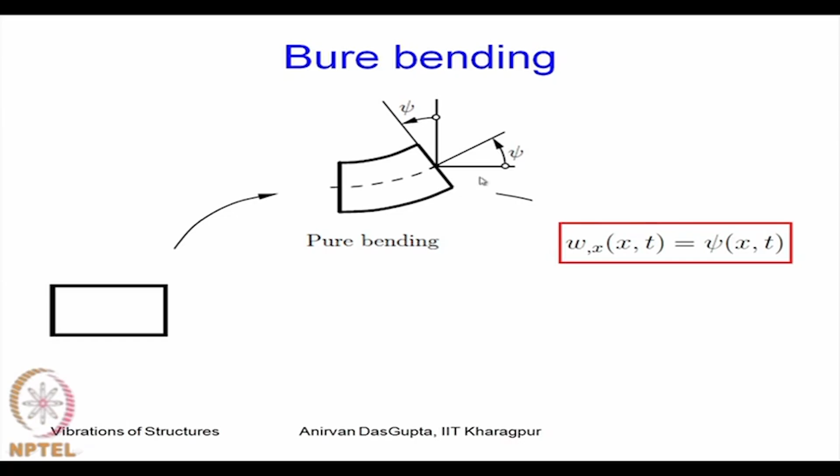So, therefore, when we put these two things together, which means that a beam undergoes both flexure and shear, it is under bending and shear. So, the total picture looks like this. This is the pure bending picture, this is the simple shear picture, and the net result is shown here. Now, you can see that because of the shear, the angle does not change, as you can see here. So, this was vertical, so this remains vertical. Which means that this angle, measured from the vertical, remains psi, whereas the slope of the neutral axis changes.

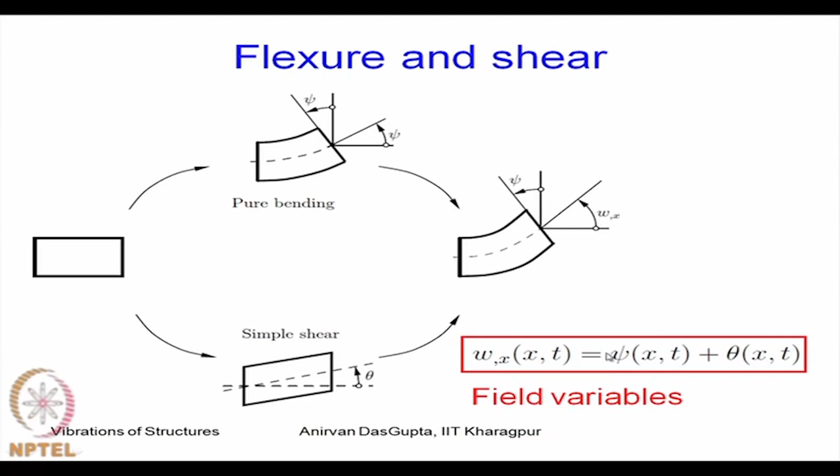So, we can consider our field variables when we denote or represent the deflection of the beam. We can use any two of them. So, what we will do is we will choose w and psi as our field variables. This is the transverse deflection and this is the flexure angle.

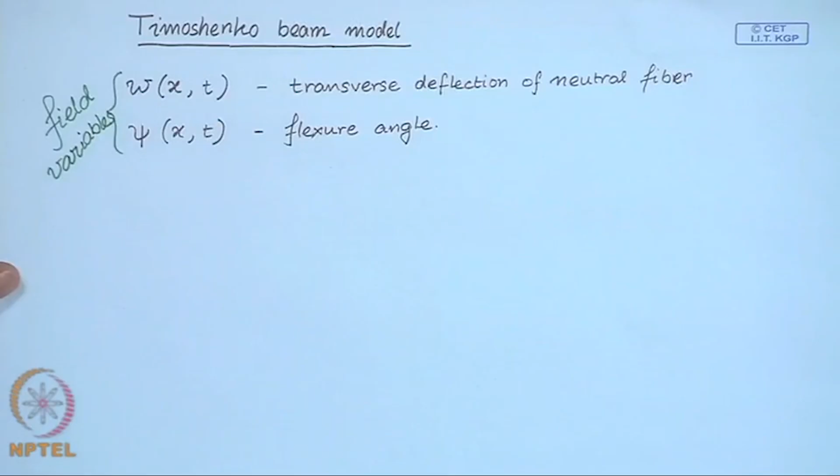So, these are the two field variables that we will use. Now, let us start representing our deformation in terms of these field variables.

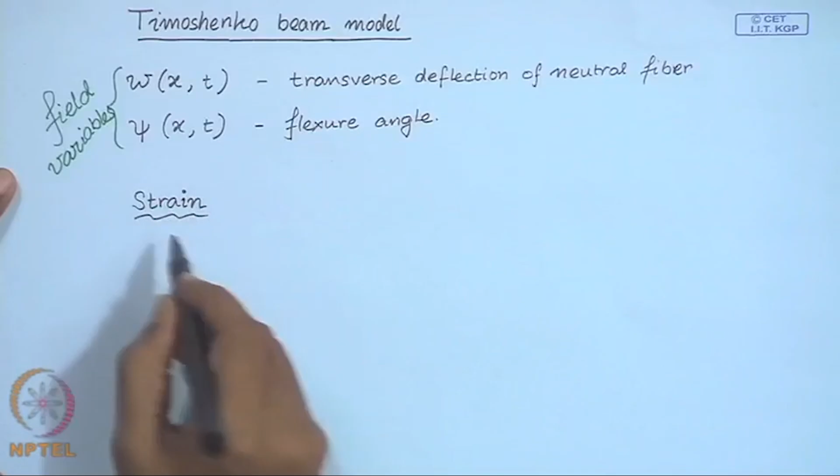So, the first thing is the strain, the fiber strain along the longitudinal direction of the beam.

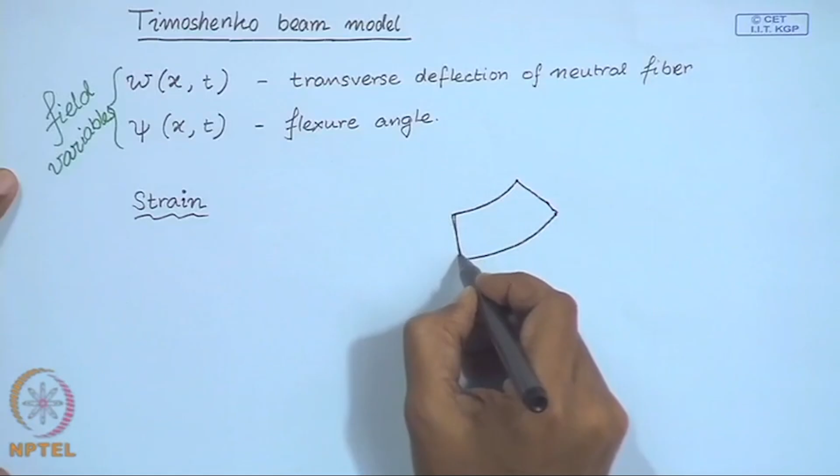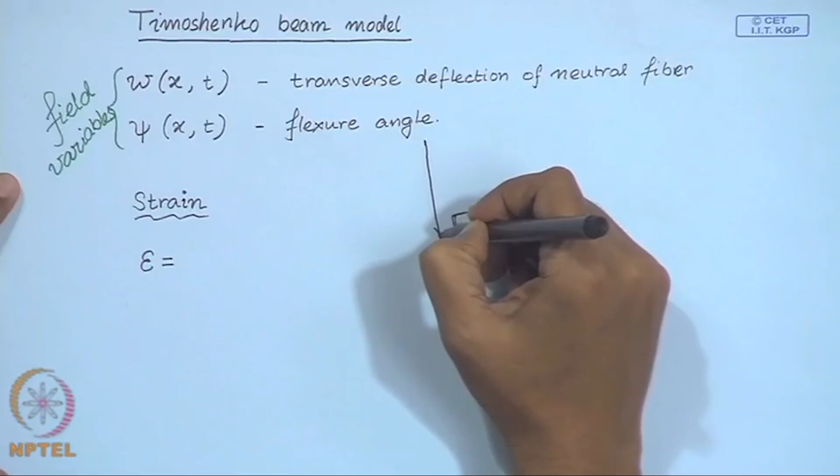If you once again consider fibers at a height z from the neutral plane or neutral axis, then following our discussions in the previous lecture, we can write the length of this fiber. If rho is the radius of curvature, then rho minus z, which is this radius, times this angle, gives d psi, the additional angle.

So, we are considering an element between x and x plus dx. The strain can be written as the current length of this fiber minus its initial length, divided by the length of the element.

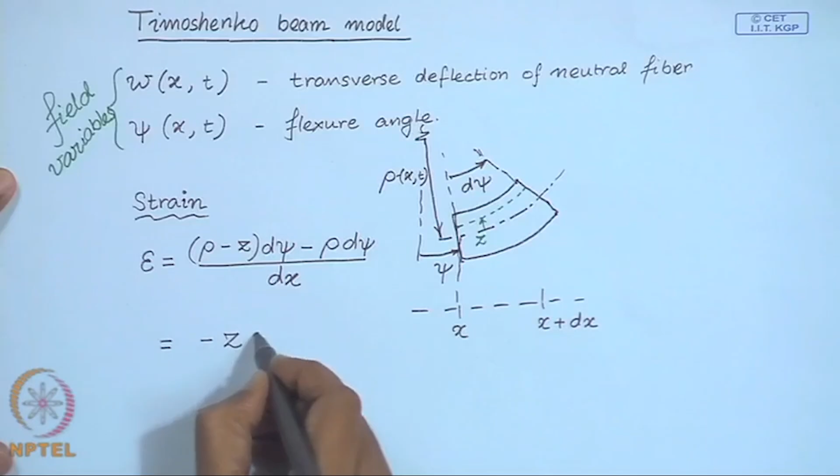This can be written as minus z del psi del x, in terms of the angle by which this section has rotated. So that is the strain in this fiber. If z is positive and del psi del x is positive, then this strain is compressive.

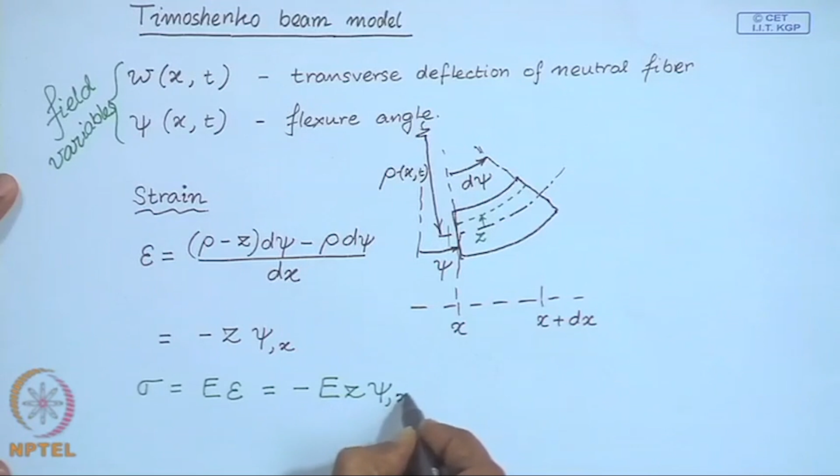Then we can write stress using Hooke's law, so that then becomes...

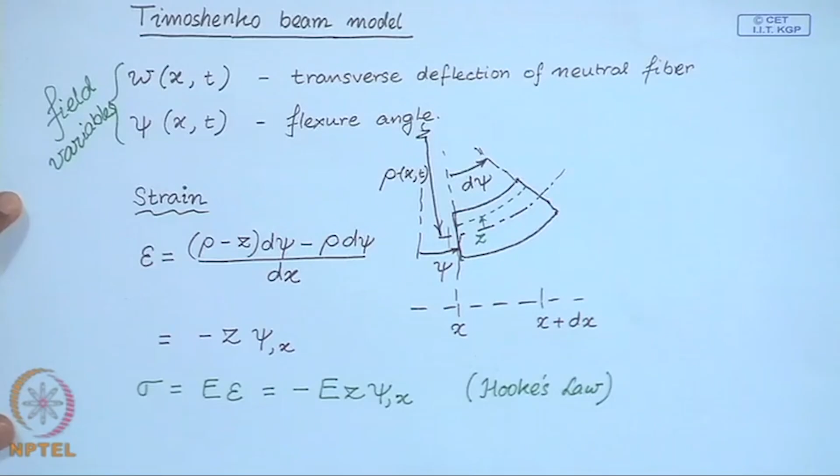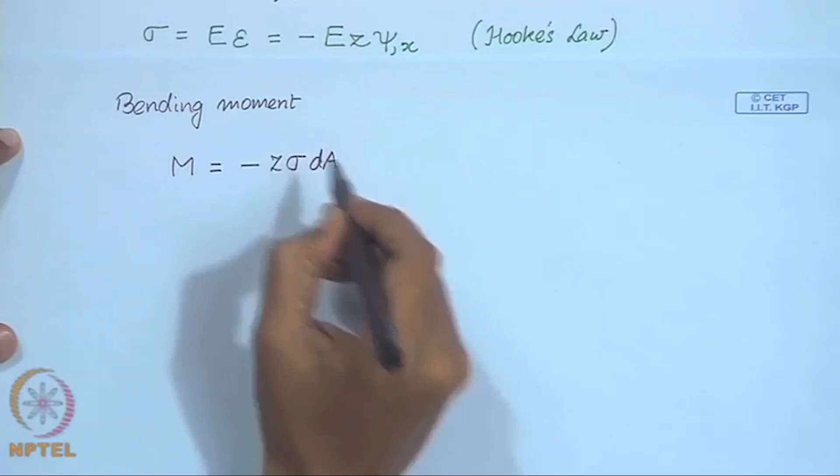Now with this expression of stress, we follow the steps that we carried out in our last lecture. We determined the bending moment as negative of sigma times dA, this is the force; so z cross the force, integrated over the area. If you substitute this expression of sigma, then you can easily see, the way we have done before, that the bending moment turns out to be E I del psi del x.

Now, the next thing is to determine the shear force. In the models that we looked at in the previous lecture, shear force was introduced in the equilibrium equations, considering that the beam element is infinitely stiff in shear.

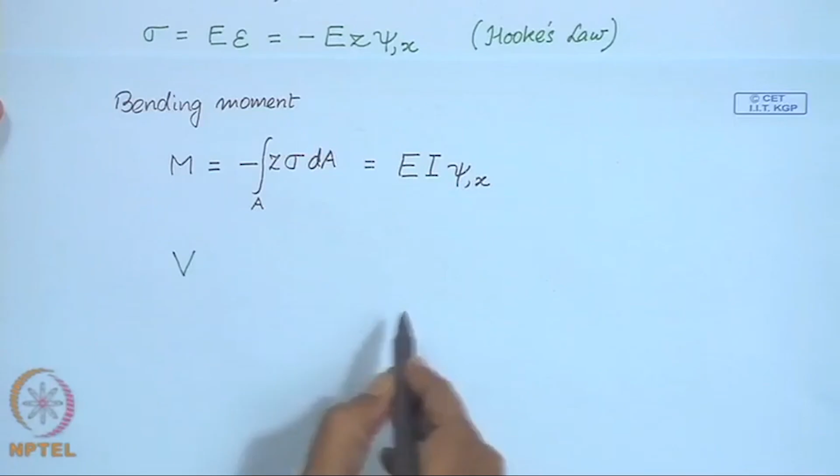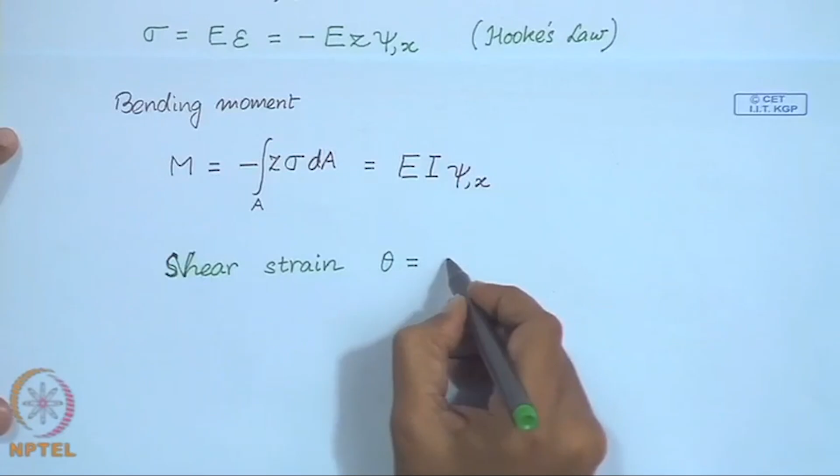But today, since we have introduced the shear strain, we know that the shear strain, given by theta, is nothing but del w del x minus psi. So we can represent shear strain in terms of our field variables w and psi.

Then I can write the shear stress acting on the cross section. The shear stress is G times the shear strain, where G is the rigidity modulus, times the area of the cross section, that gives us the total shear force.

Now, as you know, in a beam, what we learn in mechanics is that the shear stress is not uniformly distributed over the cross section. So, just multiplying it with the total area of cross section is actually going to overestimate the shear force; the actual shear force will be less than just the product of shear stress and area of cross section.

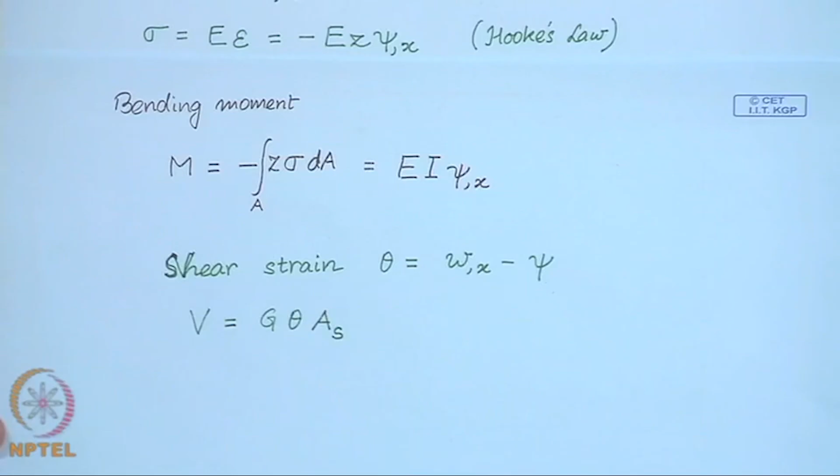So, what we do to remedy this problem and to keep the formulation simple, we introduce what is known as a shear correction factor. We calculate a corrected area, where AS is the actual area of cross section of the beam divided by a factor kappa, known as the shear correction factor.

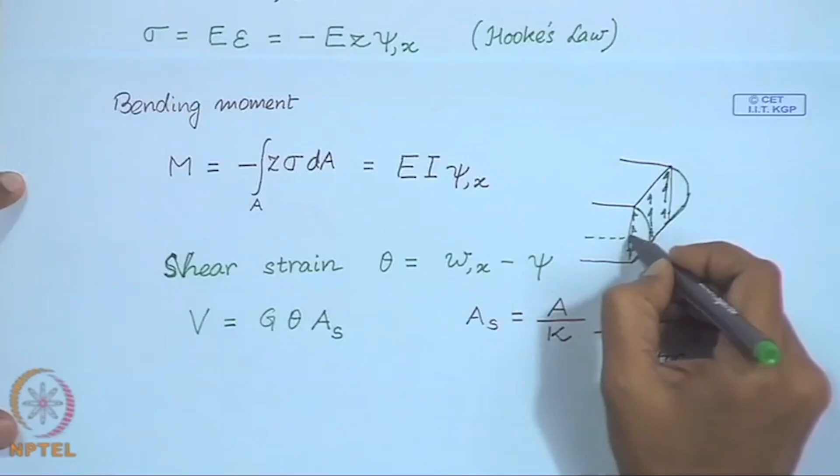As you know, for example, in the case of a beam with a rectangular cross section, the shear stress distribution is parabolic. It is maximum at the neutral fiber and reduces to zero at the top and bottom fibers, because there is no shear stress on the top and bottom surfaces. So, the distribution of shear stress in a rectangular beam is parabolic.

Now, to take care of this fact, we introduce the shear correction factor and calculate a reduced area, and multiply this area with the shear stress to determine shear force, keeping the expression simple. For that reason we have introduced this shear correction factor.

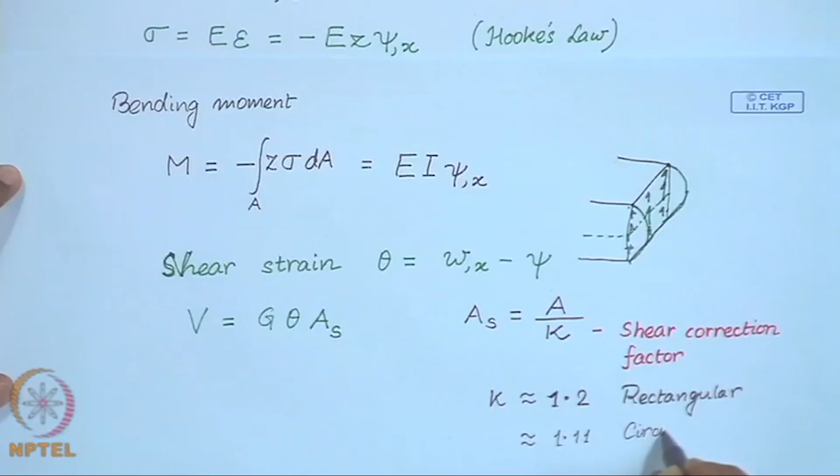Now, this shear correction factor typically takes on values of about 1.2 for rectangular cross section, approximately 1.11 for circular cross section, and from about 2 to 2.4 for beams with I cross section, I-beams. So, these are some typical values used in various situations.

Now we have a very simple expression of the shear force acting on the cross section, so we can write this as... that is the expression of our shear force.

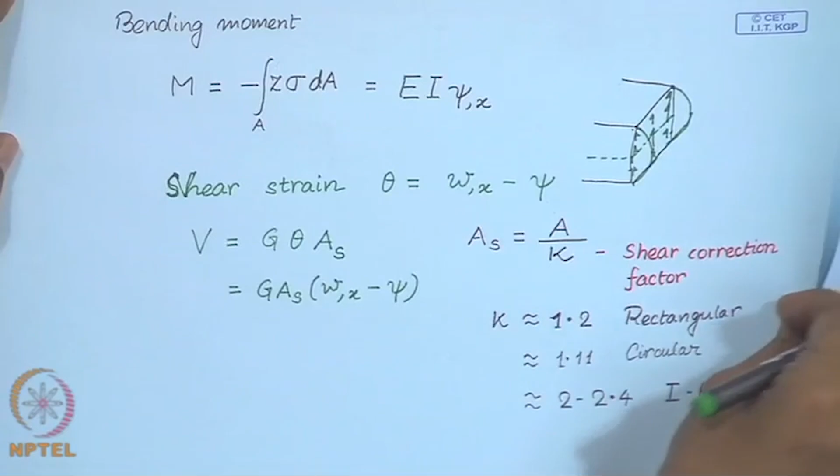Now, we have these forces and moments. Let us look at the free body diagram of this beam element. This is an exaggerated view.

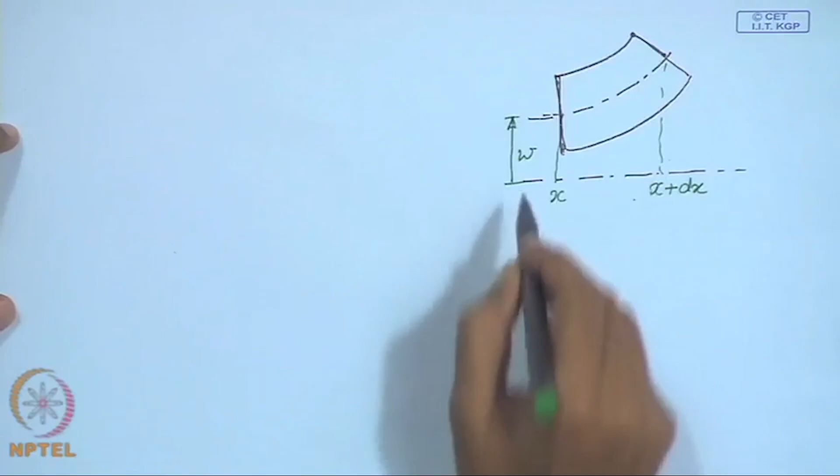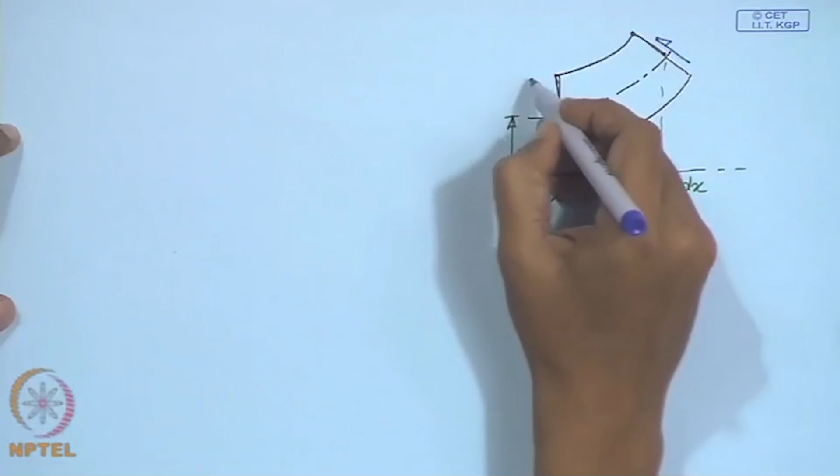So, this is the transverse deflection at x at time t. Here we also have these shear force and the bending moment.

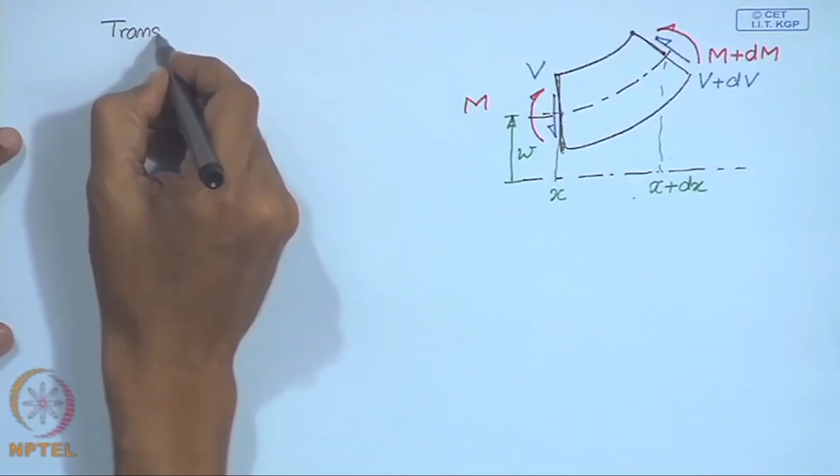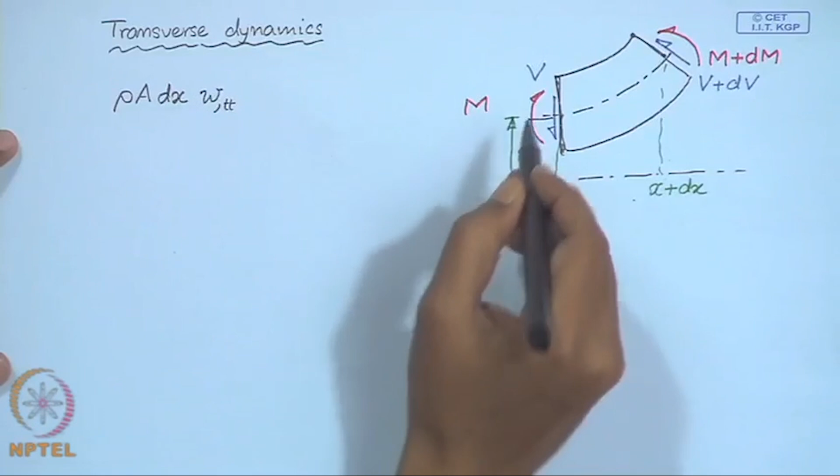So, if you write down the transverse dynamics for this element, if rho is the density of this material, A is the area of cross section, then rho times A is the mass per unit length times dx, which is the length of this element, is the mass of this little element multiplied by the acceleration, and that must be equal to.

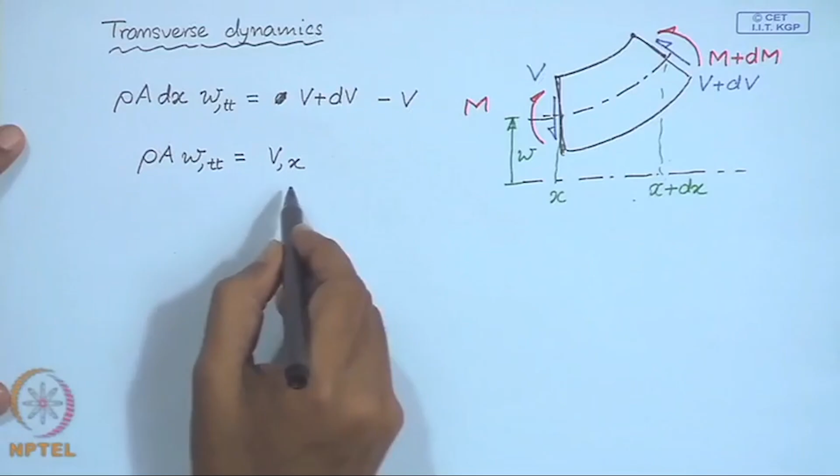Now we know that this expression of V. So, we have this expression of V. So, introducing this expression here, so this is our equation of transverse dynamics for this element.

Now, the next thing is the rotational dynamics.

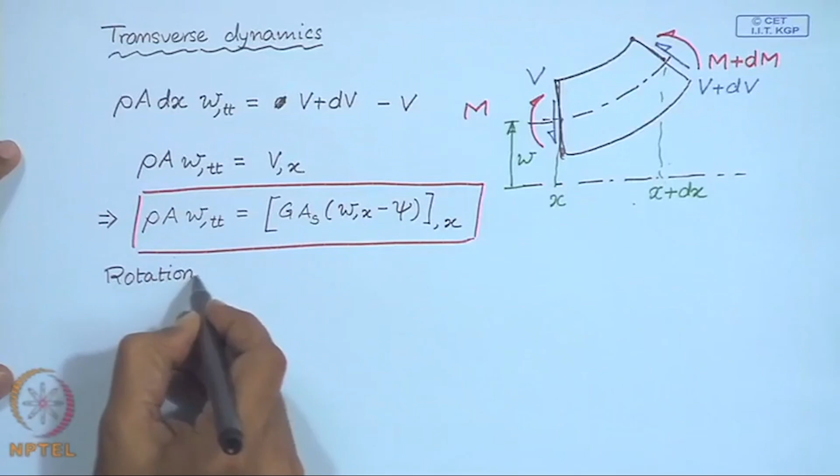So, rho times the second moment of area about the neutral axis. So, this, as we have discussed previously as well, this is the moment of inertia about the neutral axis per unit length. So, this times the length of the element would give us the moment of inertia about the neutral axis, which is perpendicular to the plane of the paper. So, this times the angular acceleration.

Now, this angle, the rotational angle, is psi. So, this is the angular acceleration, and that must be equal to all the moments about the center of mass of this element. So, we have

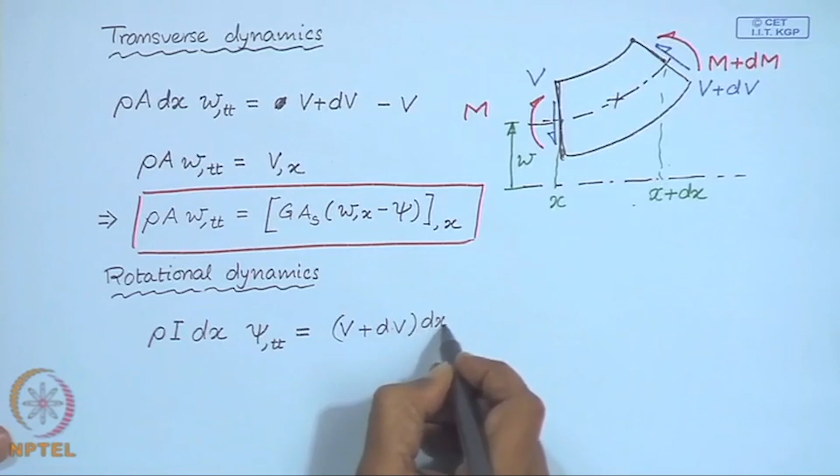Because of this shear force, and because of the moments, bending moment. So, we obtain

Dividing over by dx and considering that dv dx is of smaller order, then we obtain the equation of motion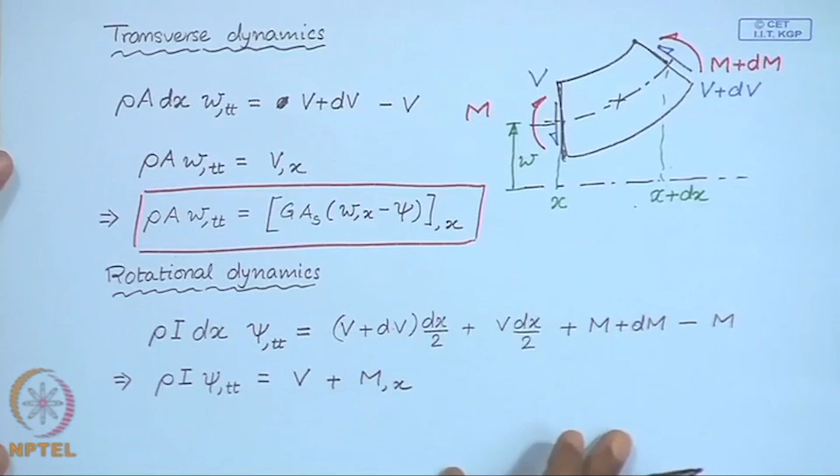Now, once again substituting these expressions of shear force and the bending moment in here, the bending moment is E times I times del psi del x, and this is what we obtain as the equation of motion of the rotational dynamics.

So, these two equations now you see we have two field variables w and psi. So, we need two equations of motion. So, these are the two equations of motion in w and psi. Now, they are coupled partial differential equations.

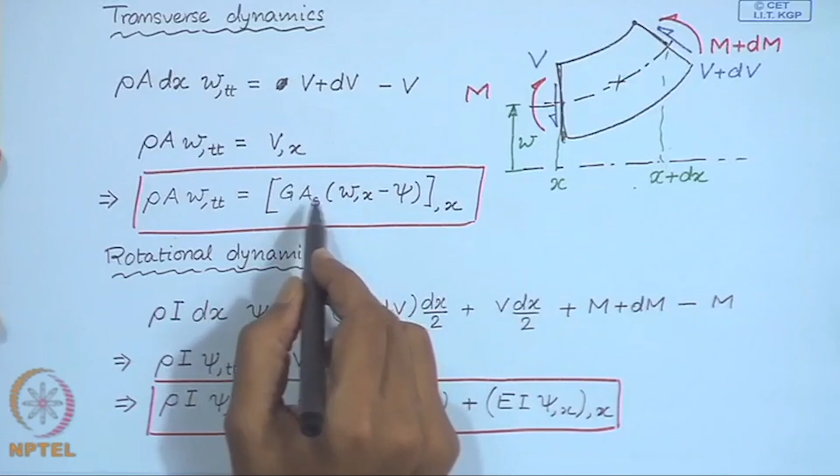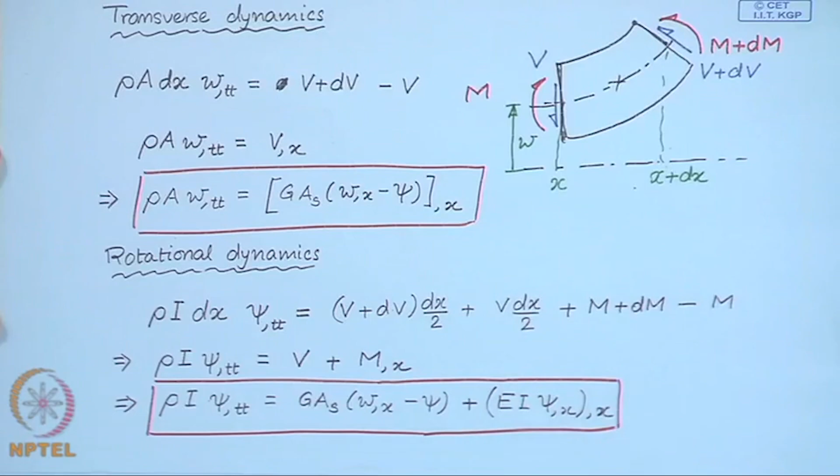Now, here in general this area of cross section can be a function of x. So, similarly, this moment of inertia, the second moment of the area, can be a function of x for a beam with varying cross section. For a beam of uniform cross section, these equations will of course simplify.

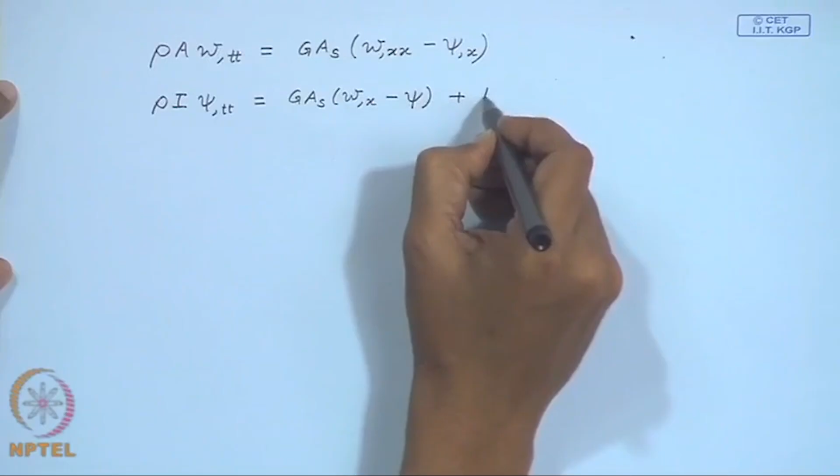So, this is the equation of motion of the transverse dynamics. So, this is for a uniform Timoshenko beam.

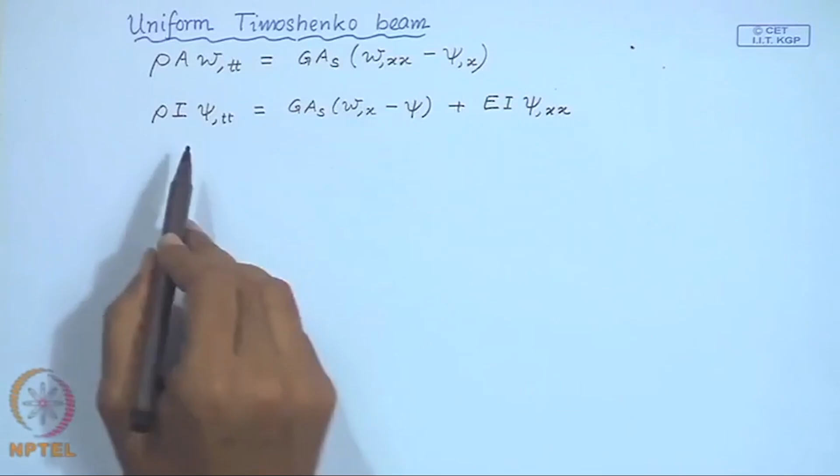Now, here it is possible to eliminate psi between these two equations to obtain a single equation in W, and to do that, if you differentiate this equation with respect to x, you will have del psi del x in all these in this equation, and del psi del x can be solved from here. So, from here I can write

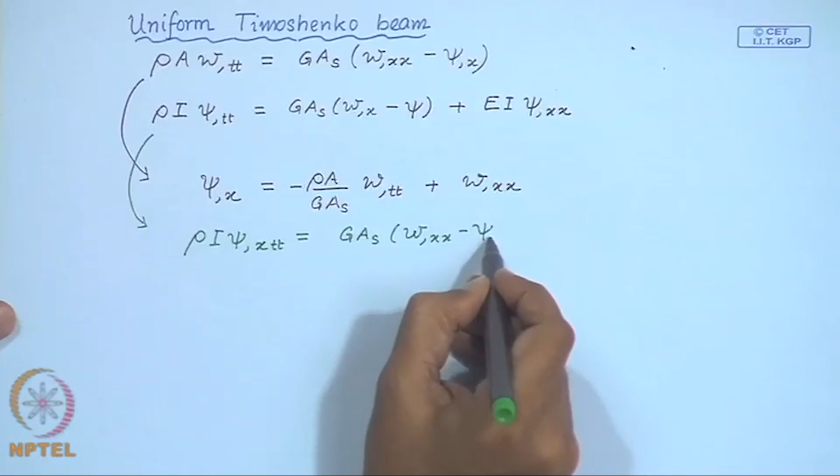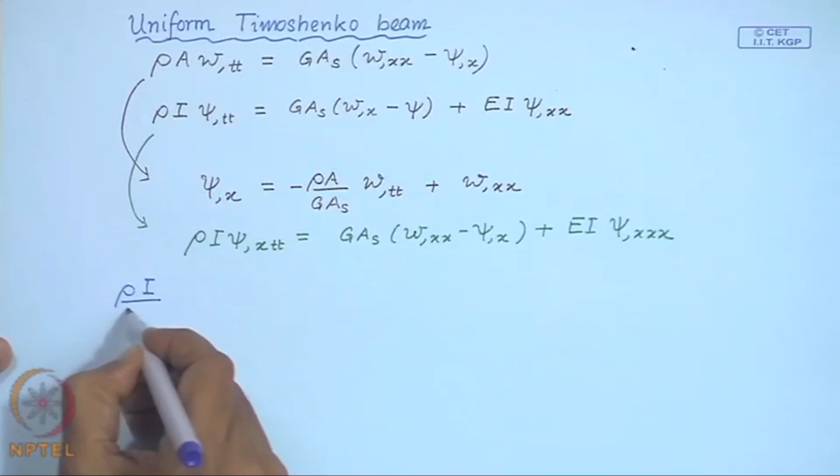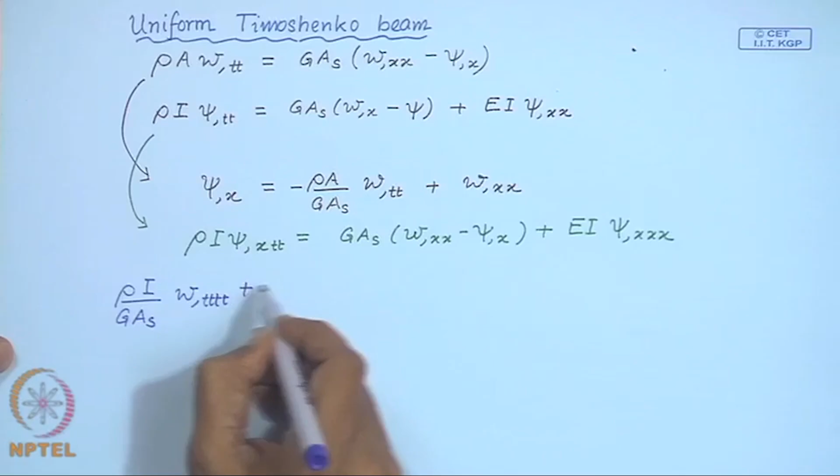And differentiating this equation with respect to x, now we are going to substitute or eliminate del psi del x in this equation using this expression. So, if you do that and simplify, this is what you are going to get.

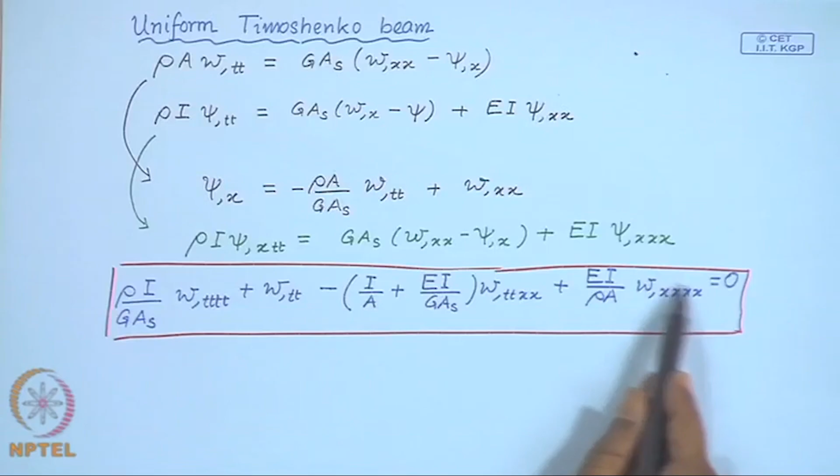Now, this equation is in terms of this field variable w, but then notice that here you have fourth derivative with respect to time. This has fourth derivative with respect to the space. So, to solve this equation, you will need 4 initial conditions and 4 boundary conditions.

You usually do not have 4 initial conditions. The reason is that though this equation is correct, solving it requires care, because it generates 4 constants of integration for the time integration and 4 constants of integration for the spatial integration. So to solve for these 8 unknowns, which you actually do not have, you have to be careful and do some additional steps.

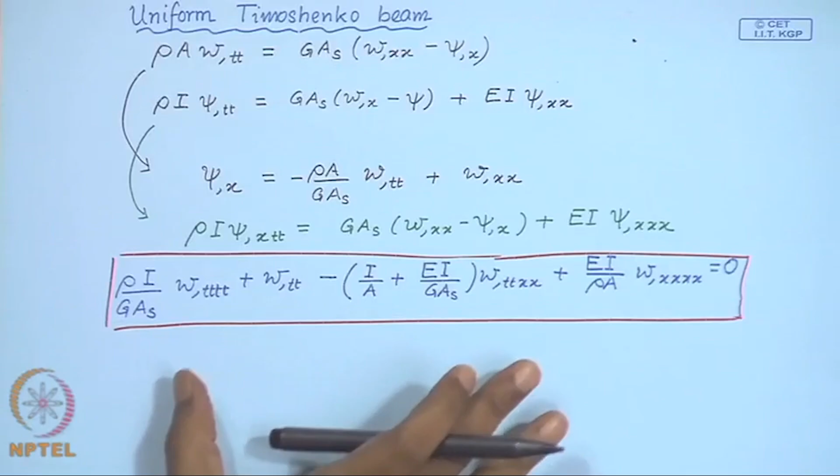So what you will have to do is take the general solution and substitute it back into these equations to find additional constraints. This is usually used to determine what we discussed in one of our previous lectures, and what we are going to discuss now - the dispersion relation for the Timoshenko beam. So that is the equation of motion.

As we have discussed previously, we also would like to have a variational approach for deriving the equation of motion of a Timoshenko beam. The reason being this gives us our boundary conditions directly, which we have not discussed as yet. So we will look at the boundary conditions from the variational principle, and also the variational principle gives us a very powerful way of approximately solving these systems, as we have seen before.

So let us look at the variational formulation for the Timoshenko beam. In the variational formulation, we write down the kinetic and potential energy expressions.

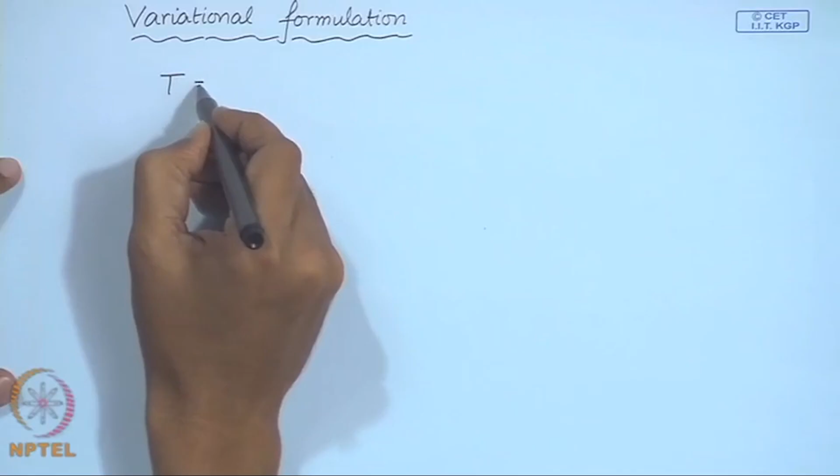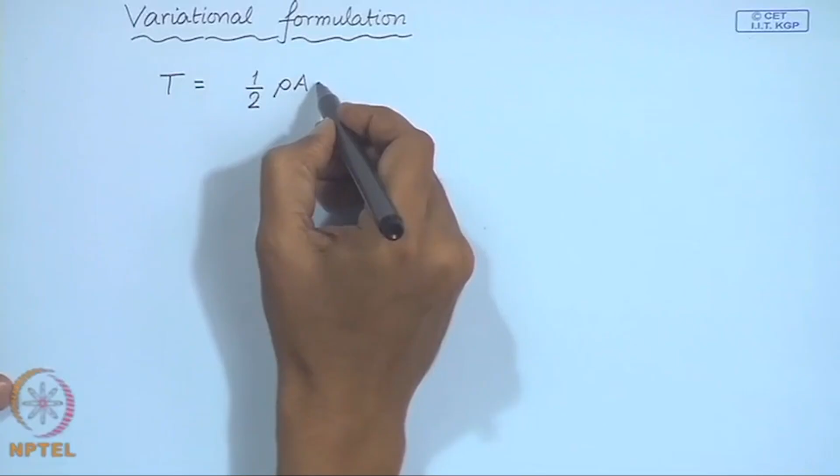The kinetic energy is 1/2 times mass per unit length times velocity square - this is the translational kinetic energy - plus 1/2 rho times I, the moment of inertia per unit length, times the angular velocity square. This is kinetic energy per unit length, so multiplied by a small length of the beam and integrating over the length of the beam will give us the total kinetic energy of the beam.

Now the potential energy - here I am using the same symbol V for potential energy. That is given by 1/2 E I times the second derivative of W with respect to x squared. This is the potential energy due to flexure, which we have written in terms of psi, a single derivative.

So psi single derivative, and that is the expression we have for the stress and strain. The product of those two will give us the potential energy. This is per unit length; over the area we have already integrated. In addition to this term, we have the potential energy because of the shearing of the element, which reads this - and these are all per unit length, over the area already integrated.

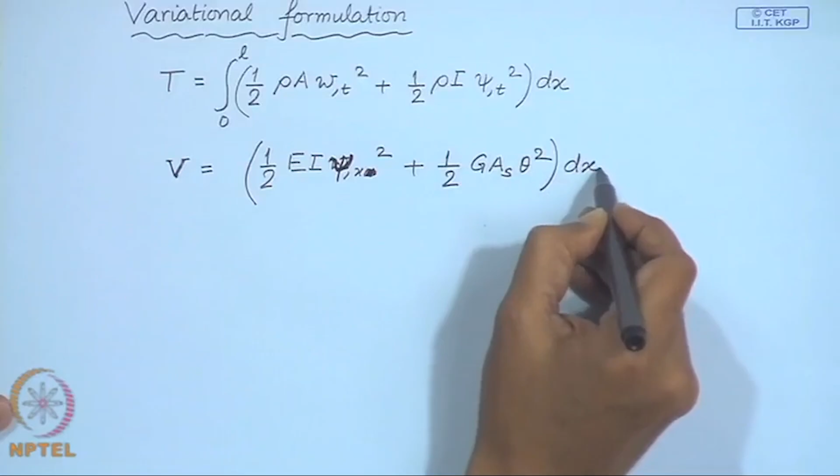So this times the small length and integrated over the length of the beam gives the potential energy expression. Now this theta we have expressed in terms of our field variables W and psi. So this is our potential energy expression in terms of W and psi, and this is the kinetic energy in terms of W and psi.

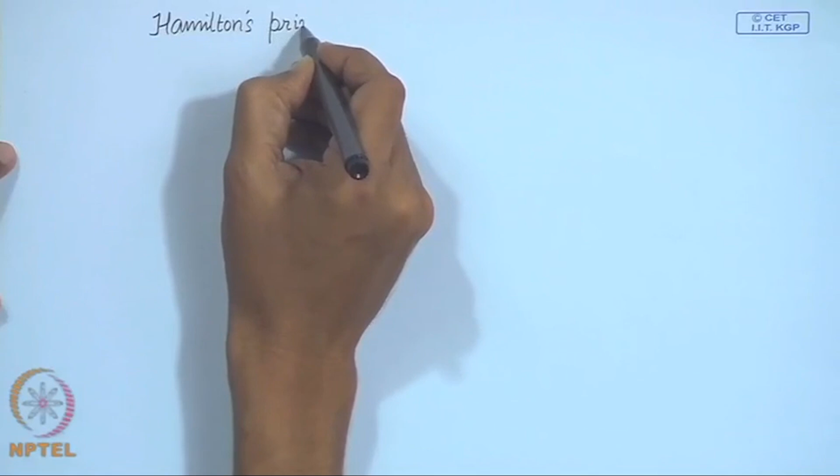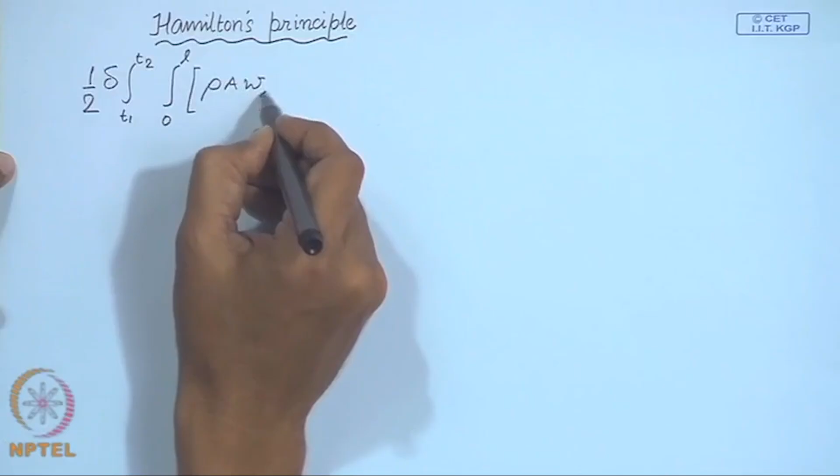Now we apply Hamilton's principle, which says the variation of the kinetic minus the potential must vanish. So if you take this variation...

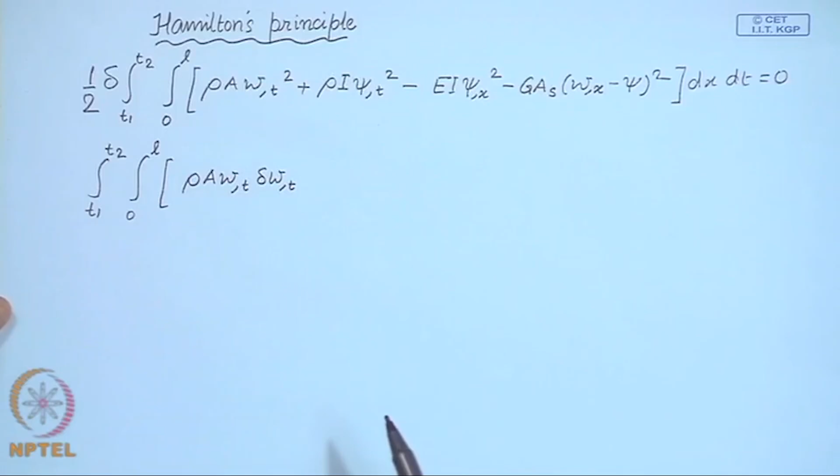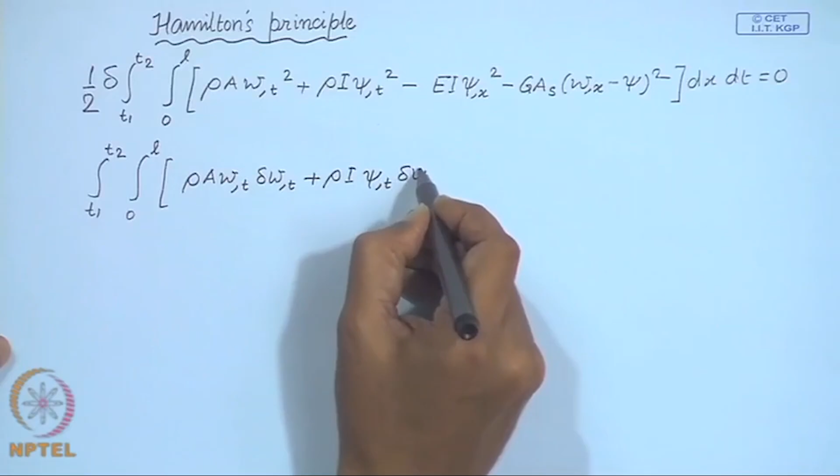So this is the variation of the kinetic energy, the rotational kinetic energy, and this must vanish.

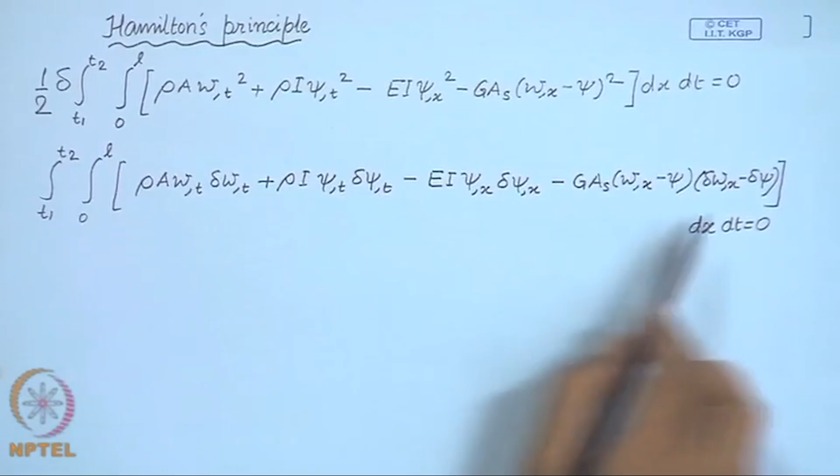Now we want to take out this variation delta W common from here. In order to do that, we have to integrate this by parts with respect to time, and this again by parts with respect to time - these steps we have discussed many times before. So those terms at T1 and T2 must vanish.

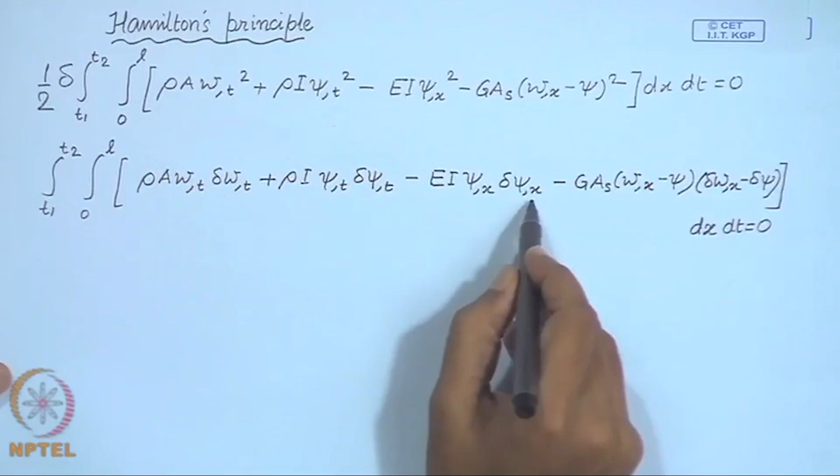Now these terms, for example this term and this term, we have to integrate by parts with respect to space. So when we do that, because of this term we have this, and these are the boundary terms. So this term gets differentiated with respect to x.

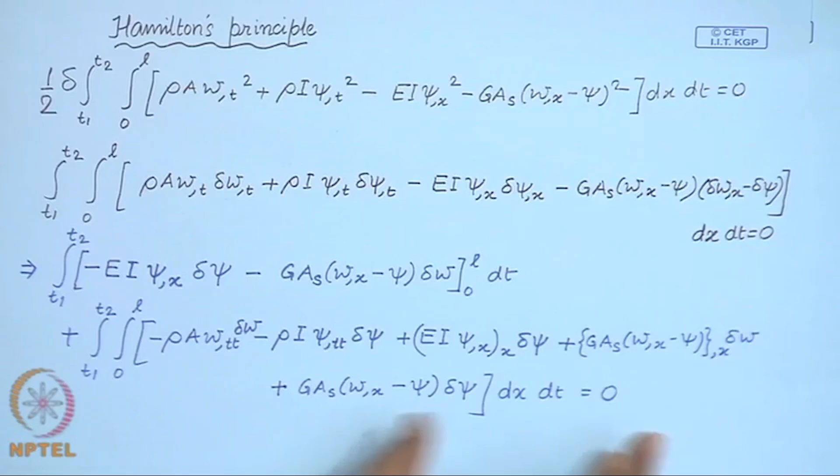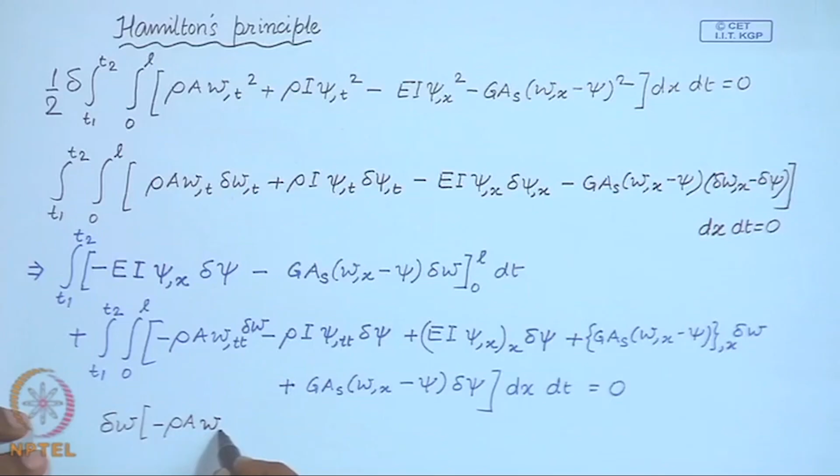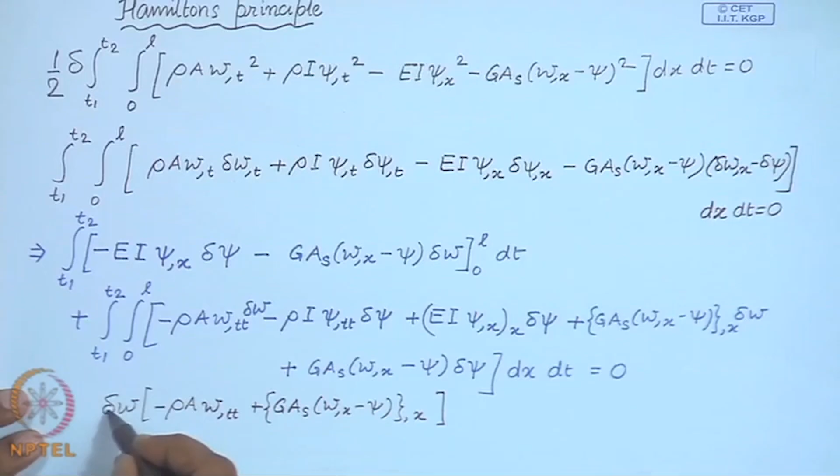So this must vanish. Now again using the condition of vanishing of these variations at the boundary and variation over the domain, we can again invoke the same arguments and obtain the equation of motion. We have to collect terms of delta W, so from here the coefficients of delta W - we can say that for arbitrary variation W, if this integral has to vanish, then this must be 0.

Similarly, the coefficient of delta psi gives us these two equations of motion that we have obtained before as well. Now from here we now look at the boundary conditions.

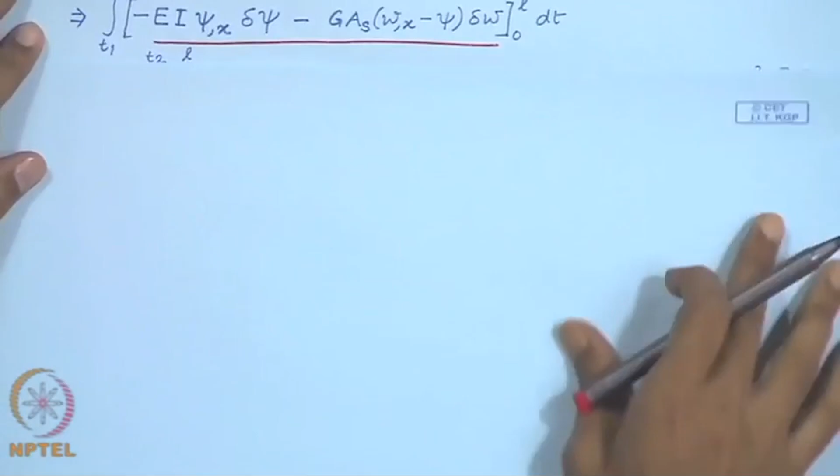So, let us look at the boundary conditions which we obtained from these boundary terms. Now, we have two field variables, and corresponding to these two we have the... so, for example, for this... so this equal to 0 or psi.

So, these are connected by or, they are conjugates. This is the angle and this is the bending moment, and at L... so these are the possible boundary conditions obtained from here, and from here, and similarly at x equal to L.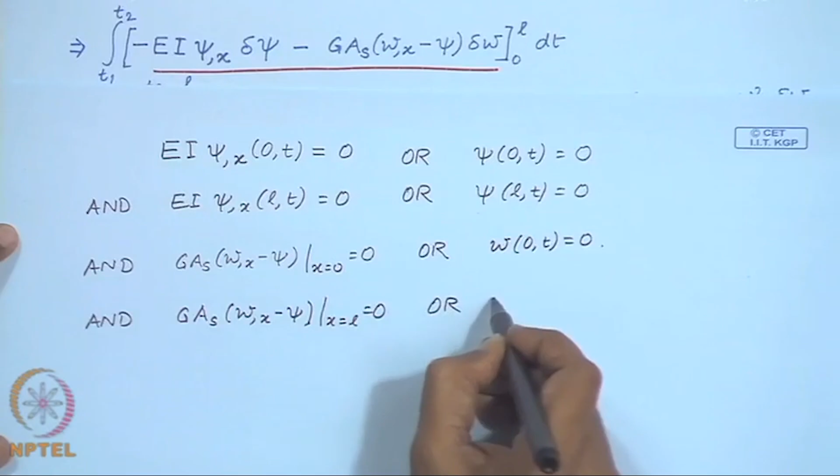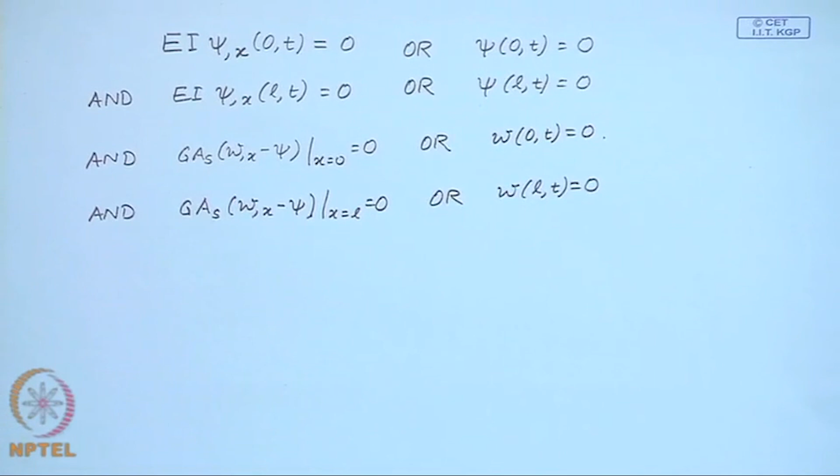So, these are the possible boundary conditions that we usually have. There are other possibilities. Now, as we have seen before as well.

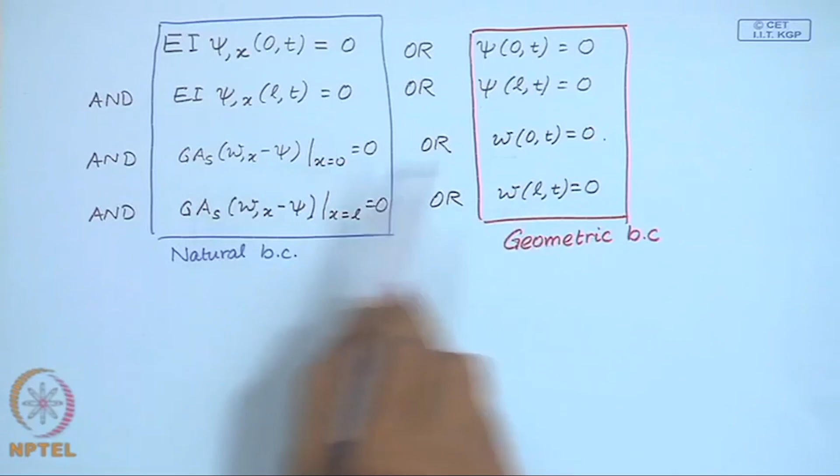So, this set of boundary conditions, these are the geometric, while this set, these are the natural boundary conditions. So, these are conditions on the bending moment or the shear force, etc., and these are on the boundary, the angle, the rotation, or the transverse deflection, and these are conjugate—one is the conjugate of the other.

So, the deflection is a conjugate of the shear force. Similarly, this angle, rotation angle, is conjugate of the bending moment. So, they come in OR, and these are the possible boundary conditions we have.

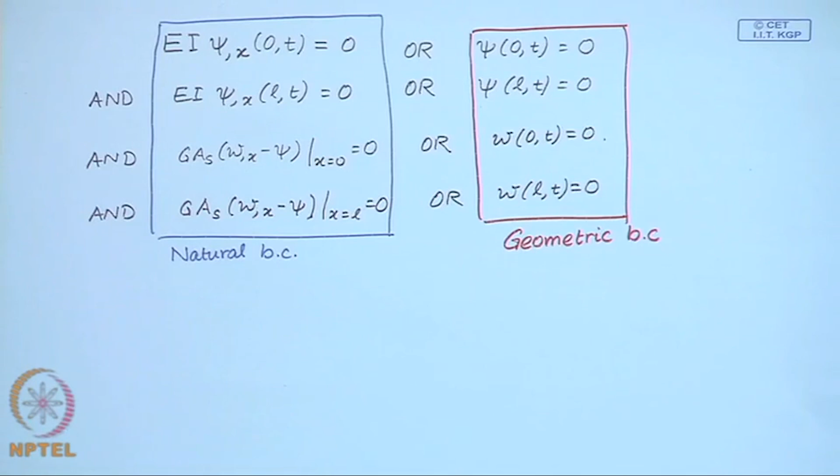Now, this Timoshenko beam still makes an assumption that the cross section which was plane before deflection remains plane, though it need not remain perpendicular to the neutral fibers. So, this is a kind of limitation of Timoshenko beam, but then you can very easily relax this by introducing more complex functions for your deflection field.

So, let us review and see what can be done. In this figure I have shown the Euler-Bernoulli theory. So, what it says is that plane sections will remain plane as well as perpendicular to the neutral plane, neutral axis. So, this was perpendicular here and it still remains perpendicular. In the Timoshenko theory, this plane section still remains plane, but now it need not be perpendicular to the neutral axis.

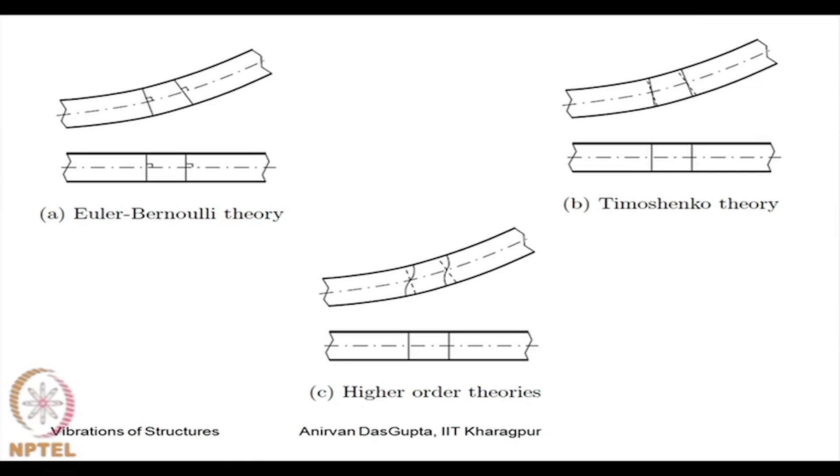Now, you can then think of higher order theories in which plane sections need not at all remain plane. So, there is warping of the cross section. So, if you want to introduce or have higher order theories for beam deflection or vibration of beams, then you have to relax this flatness condition of the cross section.

So, we introduce the warping of the cross section. To do that, here you can see the kinematics of deformation can be written out in this way, where capital U is the deflection in the axial direction. It is represented in terms of these functions psi 0, psi 1, psi 2, etc., expanded in terms of this variable z, which is the location of the fiber from the neutral axis.

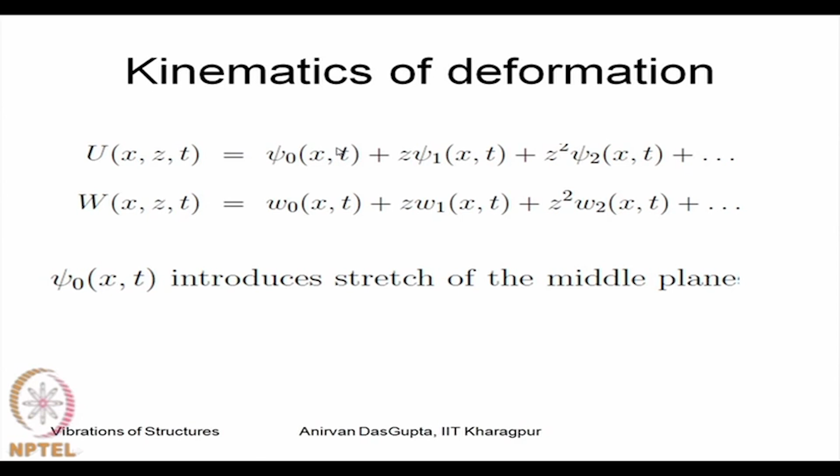Similarly, this transverse deflection is also expanded as a series in powers of z, where you introduce these field variables W0, W1, W2. Here, psi 0 introduces the stretch of the middle plane. So, using this kind of deformation field, you can write down the strains in terms of these fields.

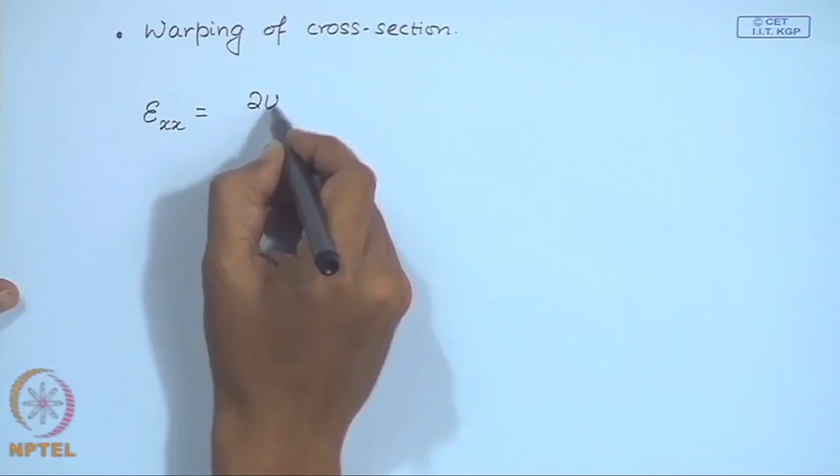For example, the axial strain can be written as del u del x, the shear strain can be written as 1/2 times del u del z plus del w del x, and the strain in z can be written as del w del z.

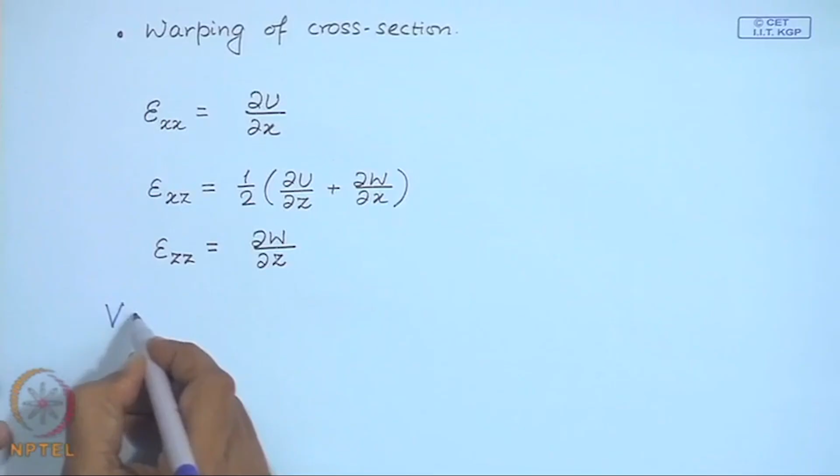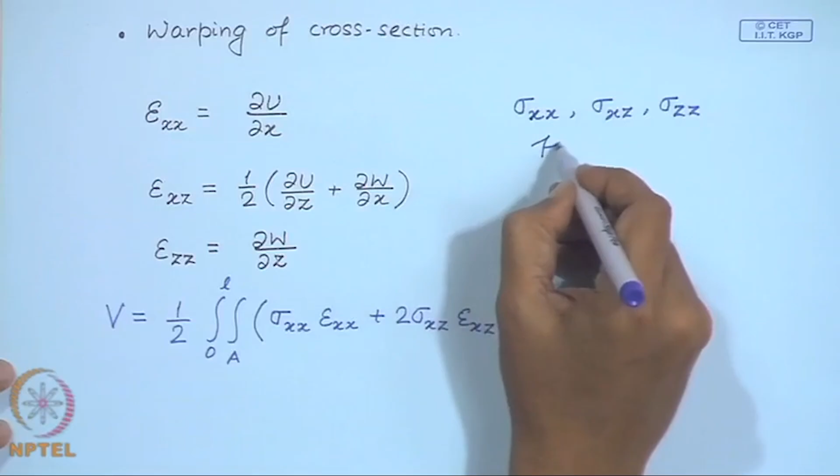Now, with these expressions of strain, you can write down the potential energy, where sigma xx, sigma xz, and sigma zz are determined from Hooke's law. So, once we have this, we can write down the potential energy. Similarly, kinetic energy can be written as 1/2...

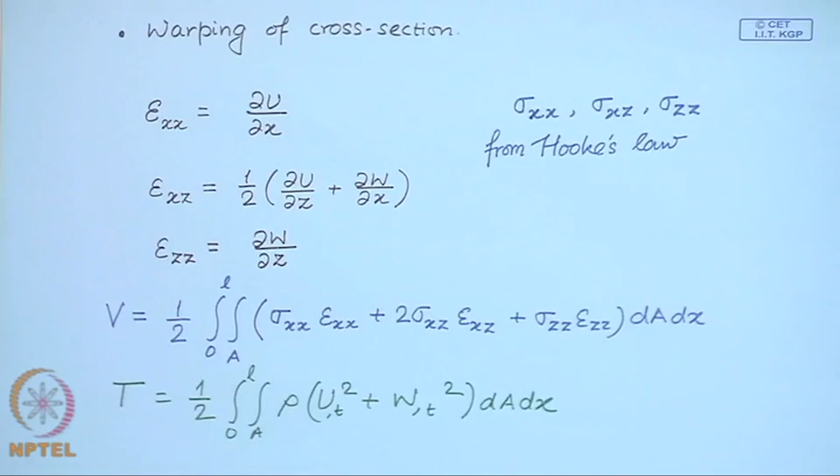Now, once you have these expressions, you follow the variational principle to derive the equation of motion. So, by taking different kinds of expansion for the field variables capital U and capital W, you can devise higher order theories for beams.

So, what we have looked at in today's lecture: we have looked at the Timoshenko beam model, which introduces shear in the beam, and this theory is valid even for thick beams. We have also briefly looked at how we can devise higher order beam theories. So, we conclude our lecture here.